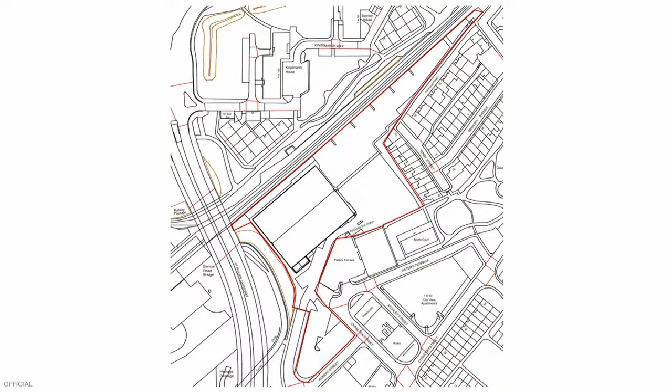The site has a number of physical and policy constraints around it. Along this northwest portion of the site is the Bristol to Bath cycle path, which is also a safeguarded area by Network Rail. Next to it is a safeguarded area by Network Rail as a former rail track that's currently not in use, and that former rail track is also an SNCI.

To the northeast of the site there is a group of residential terraces: Hemmings Parade, Tenby Street, and Brentry Avenue. To the east of the site is Gaunt's Ham Park. A small portion of the site in the south is still within the Barrow Road principal industrial warehousing area, and to the southwest is St Philip's Causeway.

It should be noted that there are a number of benefits to developing this site. It's considered to be underutilised currently, it's a previously developed site and therefore brownfield land. It's right on the very edge of the designated city centre area, and very close to the Lawrence Hill local centre, within a 5-minute walk of the train station. The site is also within an emerging regeneration area in the emerging local plan, where city centre level of density will be sought, as well as tall buildings where appropriate.

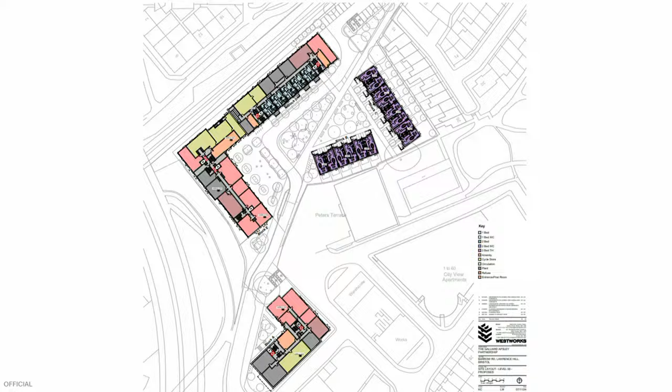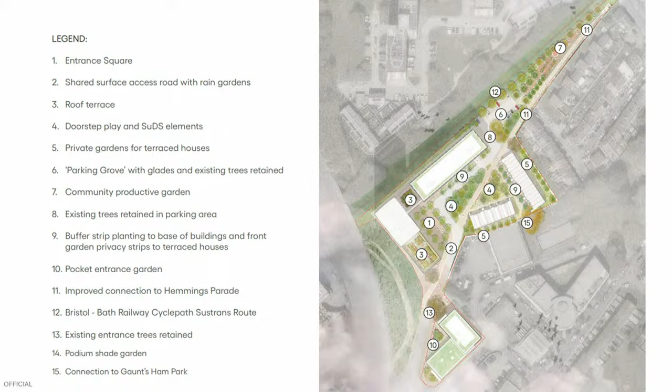Moving on to the landscape layout, there would be a social spine running through the centre of the development, including play space and community garden space, growing space in the north of the site. It would also be heavily landscaped with soft landscaping, achieving a 32.5% biodiversity net gain uplift beyond existing levels, well in excess of the current 10% requirement.

A quick note on the improvements to connectivity across the site. These aren't that clear, but full details would be secured by condition. The applicant has agreed to create a new pedestrian access to Gaunt's Ham Park, and a new level, equalities-compliant access to Tenby Street. Owing to issues with Network Rail owned land, they can't deliver at this time a new access onto the Bristol Bath cycle path, however an area would be safeguarded for its future creation as and when that becomes possible.

Looking to the right, as noted by people in the public forum, there would be an area safeguarded within a residential parking scheme to protect residents from any additional parking pressures that may arise.

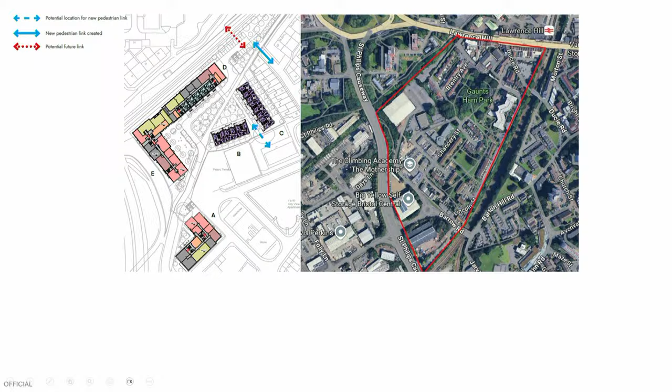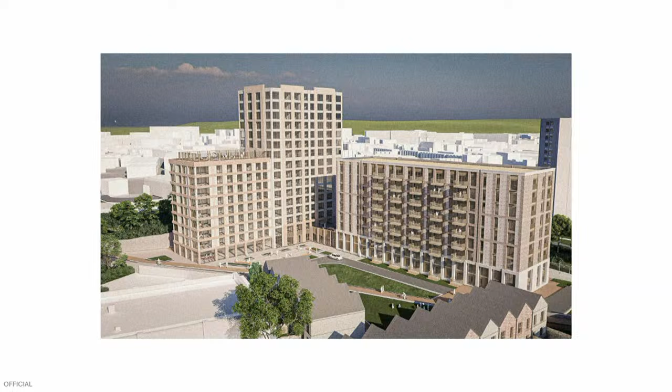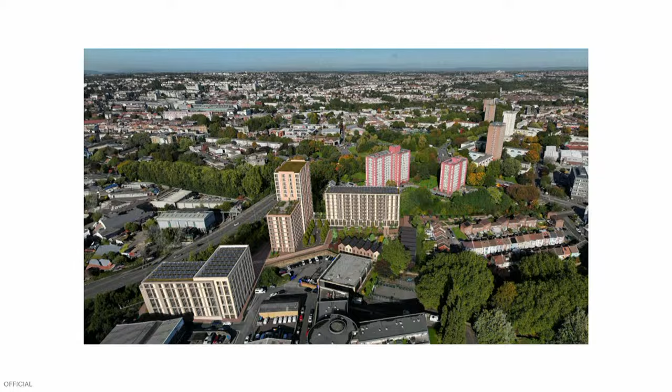Across this social spine element created in the design work, you can see Block E in the centre, Block D on the right, and the terraces in the foreground, which are Blocks B and C. This gives an idea of the general setting of the buildings and their scale in relation to surrounding development. As you can see, there's a general spine developing alongside proposals of denser, flatted development running parallel to St Philip's Causeway and Lawrence Hill Roundabout.

Moving to response from residents, 113 objections were originally received. A very large majority of these were owing to parking pressures on the surrounding area, or the perception that there would be unacceptable levels of that. That's the bulk of those objections, but not all of them. There was a considerable amount of objections from surrounding residents about the heightened massing of the buildings and their impact on amenity. There was also concern raised about the arrangement of affordable units being in one block, and notes made about how much this scheme would contribute to local amenities and need in the community.

A reconsultation was undertaken in November, and 18 objections were received. Again, the primary areas of concern were the density and intensity of development and impact on neighbouring amenity, and parking and community facilities. I should just quickly point out that revisions to proposals were undertaken.

There was an alteration to the affordable housing offering. It was originally to be a dedicated block for a housing association, Block A, as you enter the site. However, no one came forward, there were no takers for that proposal, and therefore it had to be amended as that wasn't feasible. So a reworked scheme offers 10% on-site provision, 39 units, in accordance with LHA maximum levels and capped at that level for future open market use.

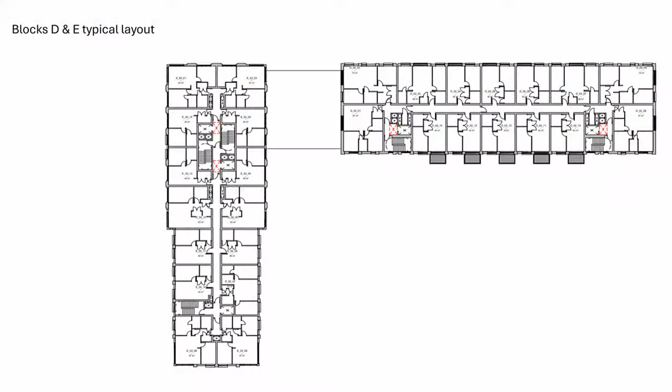Oh yes, quite right. So Zoe asked about the typical layout. Is there anything you want to comment on there, Patrick? Is it possible we can get that zoomed in a bit? It's a little bit small to see. Oh, there we go. So yes, these are the units. As I noted, they comply with space standards. We can't really control what they do with the internal spaces, in terms of what they will look like, so to speak. But I'm quite confident they would be of modern standard and high quality overall. However, in planning terms, they meet our requirements.

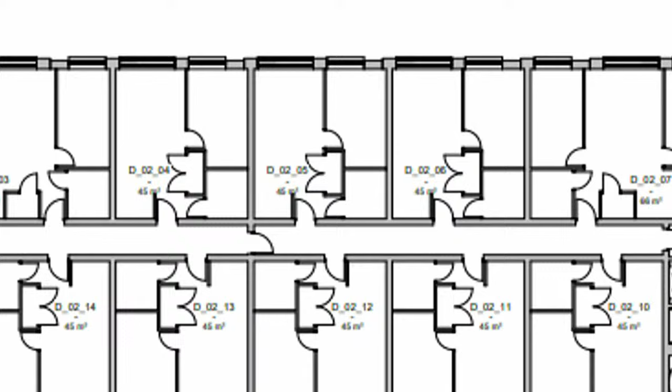Okay, I think we're going to move on to the debate. And is it a really important question of clarification?

Where do you do the laundry? I think that would be within the shared amenity spaces. There might be integrated as well. I'm not sure - I think there's a large area of shared amenity space and plant space and all sorts of space in the lower internal areas on the ground floor.

Huge improvement for British housing. Bit of maybe outside critique there.

That's fine. Okay, so should we move on to the debate? Has anyone got anything they'd like to say? Richard, you've got your hand up.

Go ahead. To me, Chairman, this is very much a no-brainer. We have here a classically underutilised brownfield site, often sadly prey to ASB and crime, with very limited community use. We have an applicant who's come forward with an imaginative scheme to build 352 houses, many of them larger 3-bedroom, and 20% affordable housing. I must say it is a long time, if ever, where I've heard a developer come forward and offer more than we've said is necessarily required from their viability assessment. So that's a plus for me, of course.

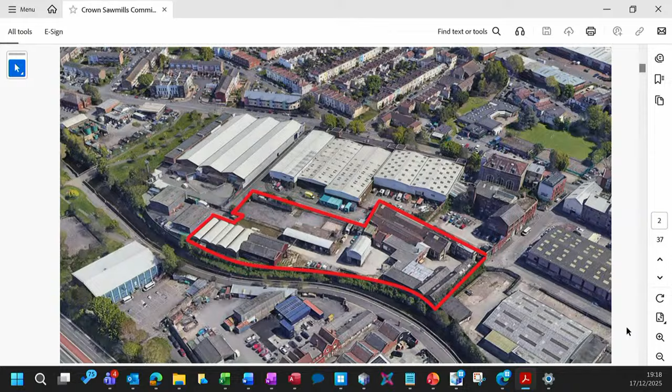The Frome Gateway Regeneration Framework, endorsed by Bristol's Cabinet in February 2024, governs the transformation of the area with its key regeneration objectives, including at least 1,000 new homes in this area, improved community and green space, a restored River Frome, climate resilient development, and more diverse job opportunities.

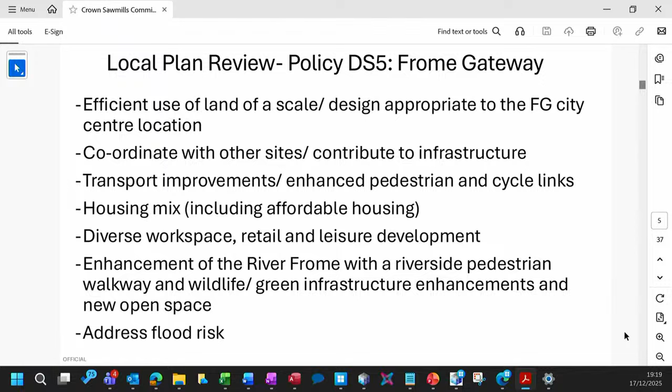The regeneration framework will be delivered through the emerging policy DS5. While not adopted yet, this is at an advanced stage and is a material consideration. The key parts of the policy relevant to this application are set out above and at page 75 of the report, and in particular, this highlights the need to take a coordinated approach to sites.

The key considerations influencing site development include, in terms of constraints, a strategic sewer running beneath the site, which cannot be built over and requires an easement - that's the red arrow on the plan. The site is also wholly within flood zone 3 at high risk of flooding - you can see the blue line outline on that plan. In addition, the Environment Agency requires access for maintenance vehicles to the river.

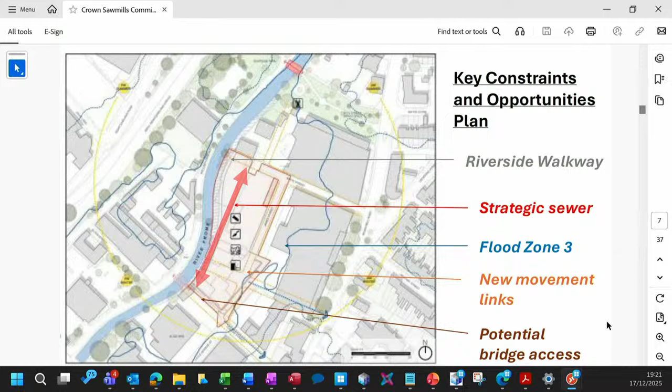The proposed layout addresses these constraints and opportunities and comprises 70% public open space. The proposed riverside park area, shown in the plan here, would enhance amenity and ecology and provide a riverside walkway and Environment Agency access. The space would be fronted onto by the proposed community space in Block D - that's the smaller block adjacent to the river - with other active employment uses shown in blue above along the river frontage and James Street. The green spaces shown on that plan are the residential lobbies with plant rooms in dark grey, and light grey is cycle and refuse stores.

The proposal also includes a connection through the site to the riverside, which could potentially join up with other forthcoming development leading to Pennywell Road. The proposal is for 352 homes of build-to-rent tenure, comprising a mix of sizes with 20% affordable housing of affordable private rent tenure and 10% wheelchair accessible adaptable homes. The housing mix is considered acceptable by officers as set out in the report, and this provision is a significant benefit of the scheme.

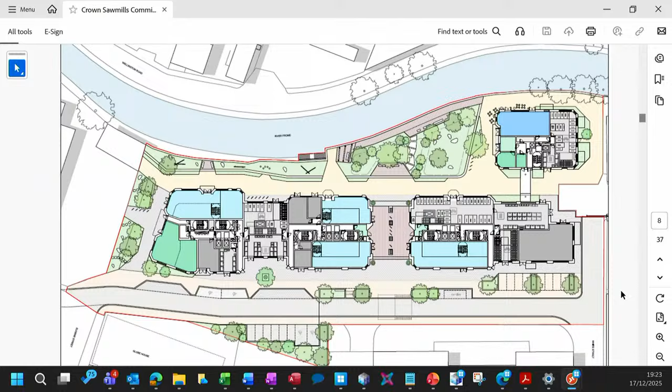In terms of the appearance, the proposal takes the form of 4 main blocks connected by lower scale link blocks to break up the massing, with varying heights, shown with the tallest element at 20 stories.

Above shows an artist's impression from Wellington Road, in particular showing the proposed brick colour variation. These are artist's impressions, and decisions should be taken based principally on proposed plans in addition. Updates to the scheme during the course of the application were minor and centred on changes to Block D, including the window arrangement, balconies and brick colour from a dark grey to red - that's the smallest block in the image.

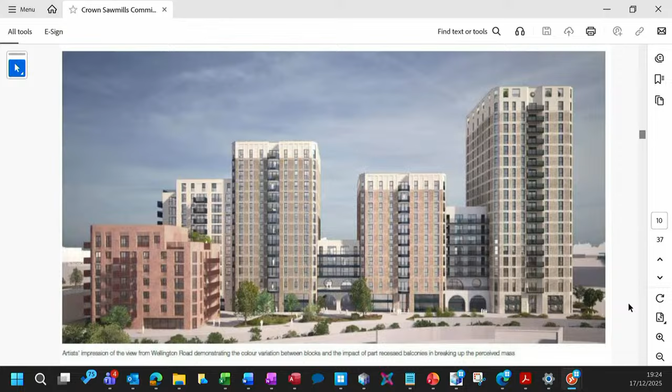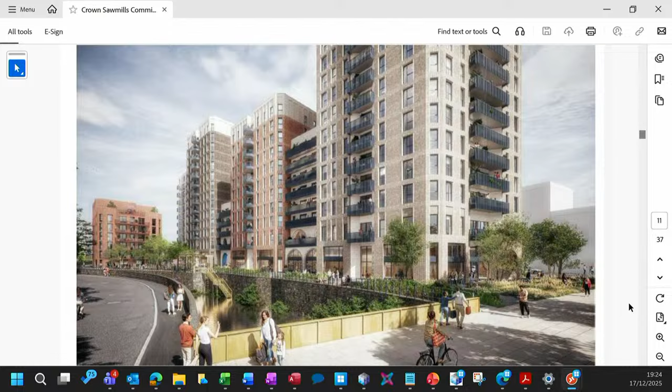Above is a further artist's impression from Wellington Road, showing a pedestrian level perspective from the bridge. The bridge crossing across the river does not form part of the application. However, it's important to note that the application would contribute land to the access to the potential bridge in order to make construction possible. The feasibility of the bridge is currently being explored.

Turning to key considerations, these are reviewed in full in the report. For the purpose of the presentation, I'm going to review the matters of height and flooding in more detail. Overall, the scheme is considered to be a quality and contextually appropriate design. However, as it is a tall building, further detailed consideration is needed.

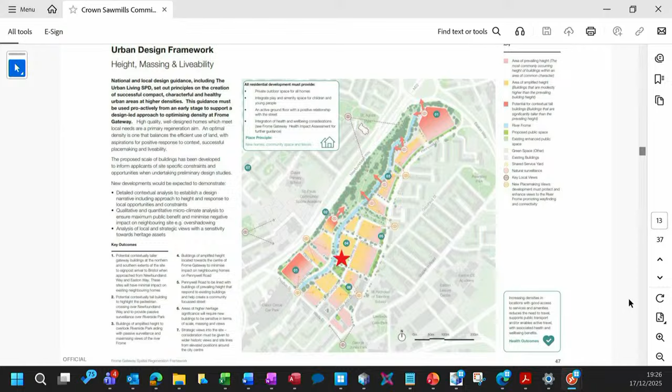Sorry, bear with me a second.

There has been some technical debate over the methodology of the view production, which the applicant has responded to. However, it is advised that when considering the closer range views, these should not be relied upon in reaching a judgment, and to exercise some caution in considering these. However, officers consider this doesn't materially affect the recommendation.

The views have been confirmed as being acceptable by the urban design team, bearing this in mind, and I'll refer to the difference between these and the longer range views in a moment. Next slide, please. So I'll just run through a number of views.

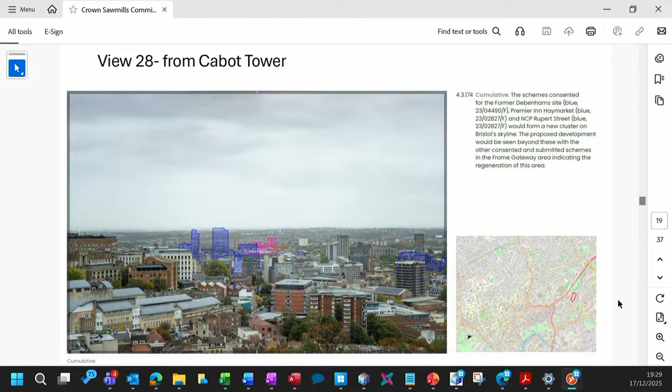Page 27 of the report refers in further detail. Moving on to the longer range views, there is no debate over the following views in terms of the methodology of the image composition. The above view from Cabot Tower with the development in pink shows relatively lesser impact than already consented Debenhams and Premier Inn schemes in blue.

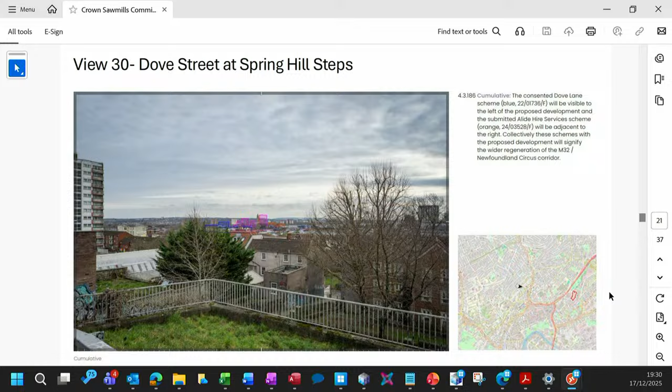Next, please. This view 30, also from Kingsdown, shows again the proposal in pink wireframe, slightly to the side and behind St Paul's Church spire, noting that obviously the wireframe does make it more prominent because of the colour. This view shows the greatest impact in the view of officers and is noted. This is given considerable weight, but still concluded to constitute less than substantial harm that should be weighed against the public benefits of the scheme, as at page 27 of the report.

And the final view I'm going to present is, again, worth noting, a winter view. It's the view from Ninetree Hill. Overall, there's no objection from officers on these impacts.

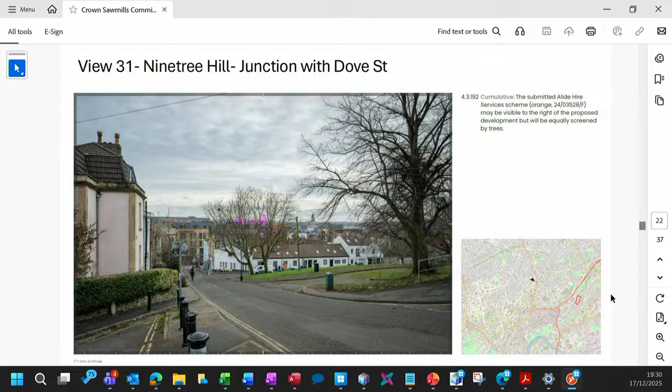In conclusion, the proposal has followed the guidance of the framework to carry out thorough visual impact assessment and is being demonstrated to be acceptable for a taller building in terms of visual impact, with other considerations of microclimate being considered within the report.

Turning to flood risk set out at page 40 of the report, since the completion of the report, the Environment Agency has provided a number of clarifications set out in full above, which officers are required to update members on. I won't go through these in detail, but members have received a copy of the presentation, and importantly to note, the above are technical clarifications and do not change the recommendations of the report.

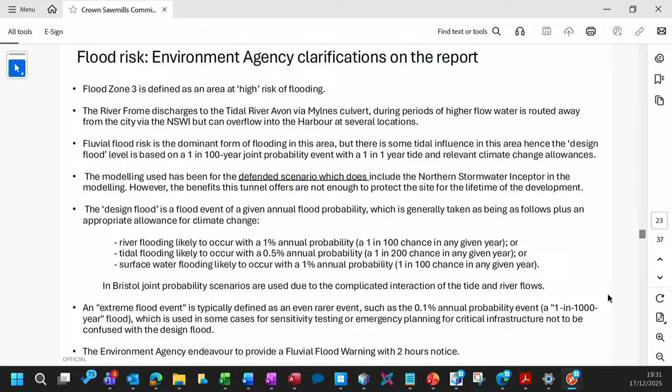In summary, on flood risk, officers have been liaising with the applicant and the Environment Agency in detail over whether the level of flood risk for the site can be addressed. While the sequential test element has been passed, addressing the other aspects has required further detailed modelling to show the off-site impacts and final flood depths affecting access routes.

The application proposes to mitigate its impact on flood risk through a water entry strategy, as shown above by the spaces in dark blue, which would mean that cycle stores and refuse stores would be allowed to flood during flood events to accommodate water that would otherwise be displaced elsewhere. The Environment Agency has indicated acceptance of this approach, subject to LPA confirmation that this is accepted to be safe. These spaces, in particular the cycle stores, include internal escape stairs and mezzanines to mitigate safety issues. Further detailed modelling aims to show the impact on flood routes.

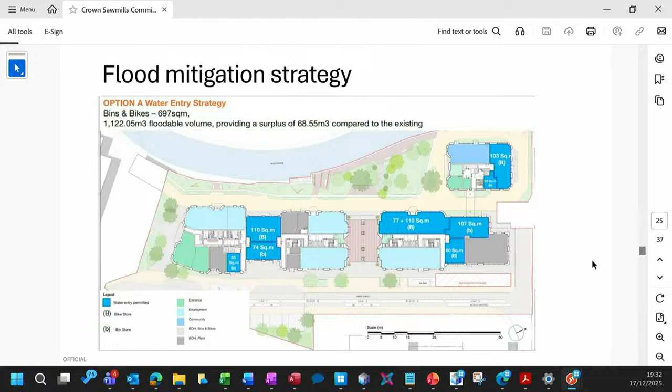Essentially, a final response is needed from the Environment Agency, and these technical matters do require further consideration, and hence officers are seeking that they be delegated to officers to consider further, while seeking the decision of members on all other matters. We do have our flood risk manager with us today if you have any further comments on this.

So, in concluding remarks, in view of the Council's housing land supply, the NPPF requires a presumption in favour of sustainable development unless there's a clear reason for refusal based on protected assets. In this case, that would be heritage assets. And in the view of officers, this wouldn't be a reason for refusal. The second part of that being whether any adverse impacts of granting consent would significantly and demonstrably outweigh the benefits.

So just in the final slide to conclude, the summary above provides an overview of the main shortcomings or key impacts of the proposal versus key planning benefits, also summarised at page 55 of the report. In particular, the proposal is for build-to-rent homes on brownfield land, making more efficient use of land in a sustainable location, providing policy-compliant, affordable and accessible homes which carry substantial weight.

This proposal also makes significant public realm provision. So in the view of officers, the planning benefits would clearly outweigh the adverse impacts and would achieve the delivery of the framework objectives. So just to reiterate, officers would be seeking delegated authority for approval of the application subject to resolution of flood risk, also subject to drafting conditions and section 106 matters outlined within the report. Thank you.

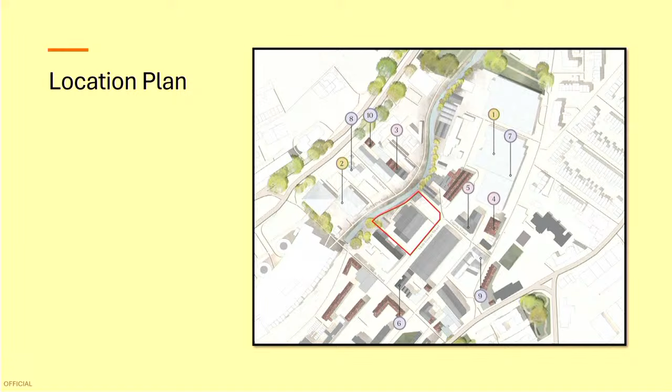As I say, I'll whiz over these quite quickly, but this is the site which is directly adjacent to the Crown Sawmills site that you've just been considering. Currently, it's allocated for employment use, and it's also within the Old Market Neighbourhood Plan area.

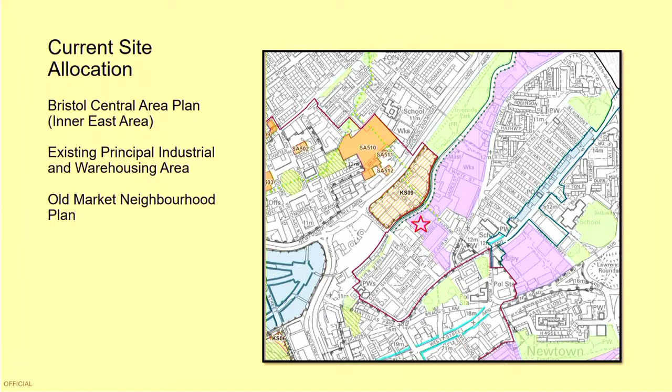Whilst its current allocation is for employment, it is within the Frome Gateway Regeneration Area, which is covered by Emerging Policy DS5. I won't expect you to read all of that, but I've highlighted the bit that's probably most relevant to your decision today, which is that Emerging Policy does set an expectation for provision of 500 student bed spaces within the Frome Gateway area. As we sit at the moment, there are no bed spaces that have been provided, so this would be the first scheme to come through to provide student bed spaces. On those grounds, we feel that it does accord with the emerging policy, and as you've heard previously, we feel we can give that quite a lot of weight in this case.

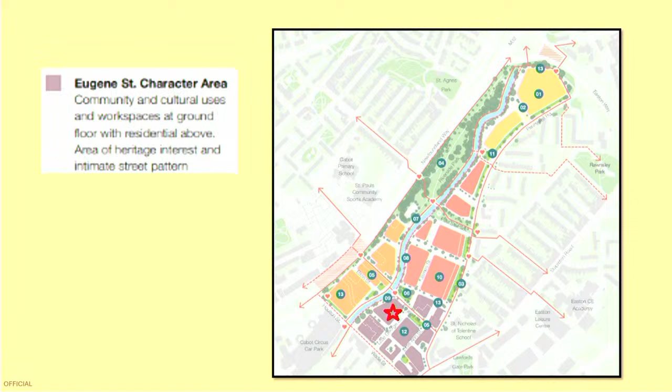Frome Gateway is divided up into different areas, and this is the Eugene Street character area, which, as well as residential uses, also talks about ground floor uses, particularly cultural uses and workspaces, again in line with what's being provided on the application site.

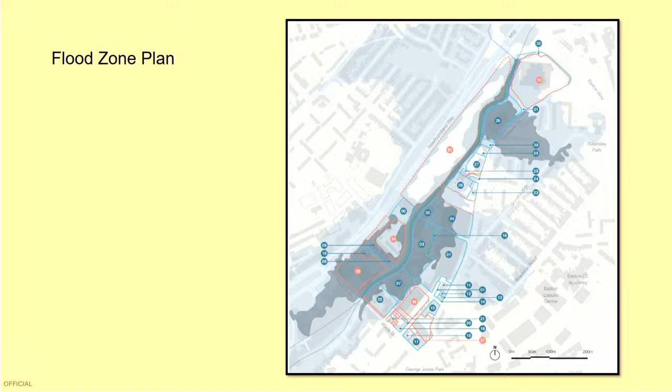Here's the flood zone map, which you'll be familiar with. This site is pretty much entirely within flood zone 3. The slightly lighter blue colour is flood zone 2, which is medium risk of flooding. As we've previously touched on, this area is liable to flooding. I'll talk a little bit about the Environment Agency objection in a moment.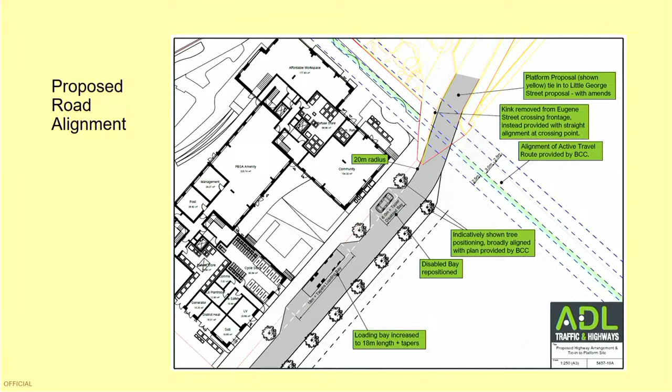In terms of the scheme coming forward, you'll see in the report there are quite detailed comments from the highway officer, and we've been working hard with the applicant to provide as much of those highway changes to turn this site from an industrial area into a more appropriate site for residential. Essentially those parameters have been set by us in terms of how that road links up with the James Street extension that the Crown Sawmills site will deliver, and then the Eugene Street extension, shown in lighter grey on this plan, will link with a potential pedestrian cycle bridge across the Frome, which this site will deliver the link for. As before, the bridge is not part of the application. We're still considering the viability of delivering a bridge in that location, but this scheme makes allowances for it. So that's really set the parameters for the site in terms of what's the developable part of the site.

The building itself is an H-shaped building. It's not very clear on this plan, unfortunately, but that space in the bottom right-hand corner is the community floor space. In the top right-hand corner is marked as workshop space, although it will be a sort of flexible E-class use, which could be something like a cafe or similar. There's also a Frome side walkway going through.

We intend on securing the final landscaping details through condition, but this has been set so that the Environment Agency have access to the River Frome. We think that can be restricted a bit, and we can get a bit more landscaping in that area through condition.

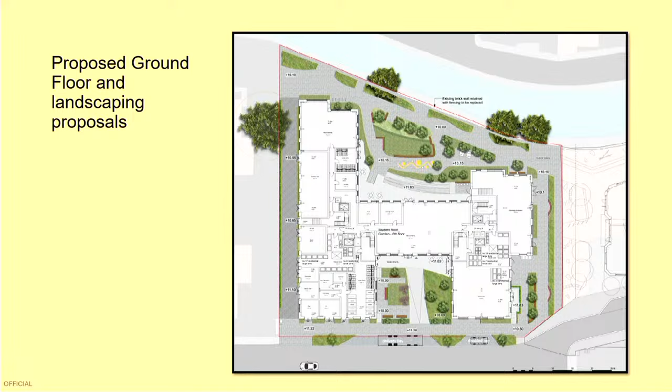It goes up the building in very much that fashion. This is the 6th floor. I included this because it shows access to a rooftop garden.

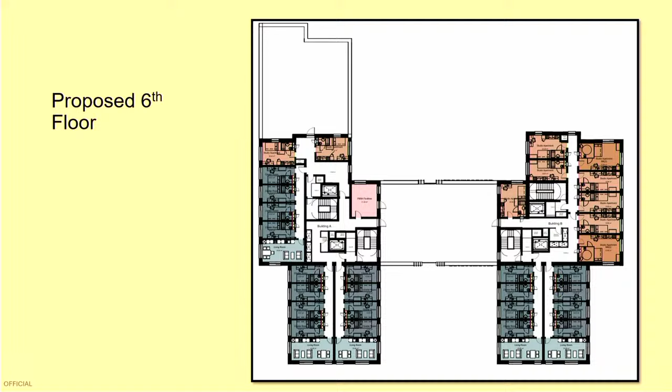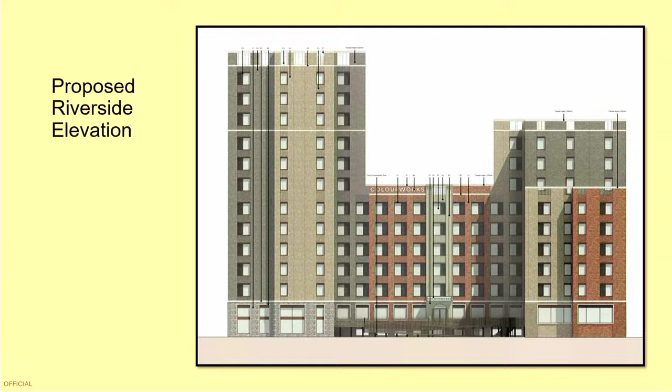In terms of flooding, this site is probably simpler than Crown Sawmills, but there is still a high risk of flooding on this site. The building has been designed so that those two purpley bits on the plan are a raised slab with a void underneath, so floodwater will travel underneath the void, providing mitigation to prevent the floodwater impacting on neighbouring sites. All of the residential accommodation will be above the design flood level, which is the level it needs to be at to be safe in respect to the Environment Agency's concerns. And in this case there is access out to the road, which will be reasonably dry in any flood conditions.

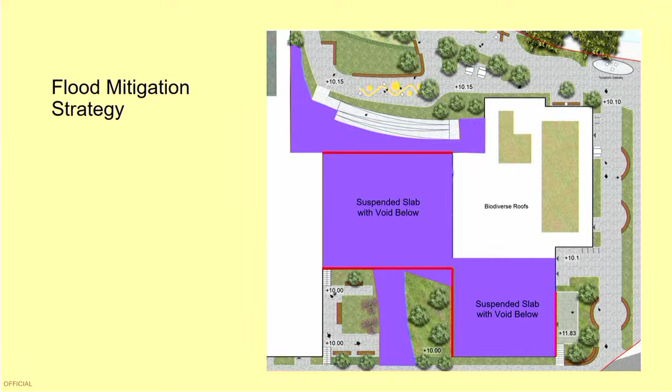The outstanding concern from the Environment Agency is a technical modelling point, essentially about whether the modelling has taken account of all the necessary scenarios. It's very complicated and expensive to run modelling runs, as I understand it, but we've asked them to run another model to take account of all those scenarios. We're pretty confident it will show there's no impact on neighbouring sites, but as before, we're asking for delegated powers to approve the scheme once that issue has been sorted.

I thought I'd include this, which shows it in terms of the existing and emerging context. You'll see the neighbouring site in beigey colour, which you've just resolved to grant permission on. The current application is in pinky colour, which we're currently considering. The yellow is approved development, and the green colour is another scheme at pre-app stage, but that's quite a long way off, so I won't worry too much about that one.

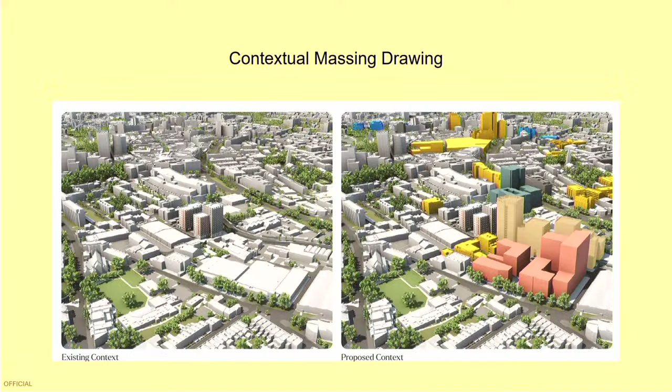But it does show you all the other schemes that we are considering in that area at the moment.

As a final conclusion, I've listed what I think the main considerations are, and how much weight I think should be given to them. It's pretty green, I think, so that's positive. The only potential issue is the scheme is slightly higher than the parameters suggested in the development brief, but as you'll have discussed earlier, that is only guidance, and actually this one is pretty close to what the development brief expects anyway.

Maximum height is 12 storeys, by the way. I probably didn't say that, but it's 11 plus ground floor.

Finally, heritage impacts are neutral. We're happy with the amenity impacts. Climate change performs well, transport performs well, biodiversity performs well.

The red issue is flooding. We're confident that it can be resolved, but we do need to wait for the Environment Agency to comment.

Just a couple of final things to bring to your attention. The CIL allocation from this site will be, depending on the uses of the ground floor, about £2.1 million, so that will be a contribution from CIL.

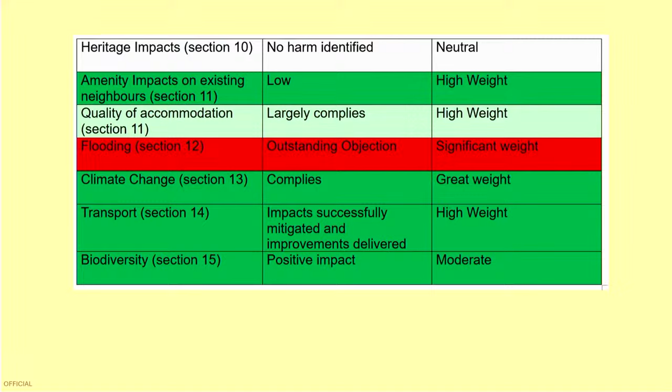Thank you, Lewis. I think I'm going to start by just asking for the health thing again. Sorry, could you just please say one more time, Jim, because if people watch one section of this meeting back, it's important that we recognise it — the health implications of this in terms of provision. Sorry, Jim, but it is, yeah. I will go shorter this time.

Thank you, Councillor Reddy. So, there is a health impact, or an impact on GP surgeries. We're not unsympathetic to the ICB. We just feel it's quite difficult at the moment to secure planning obligations in the form of financial contributions, simply because the ICB aren't able to identify surgeries in the local area that they're looking to expand or increase capacity at, and at the moment they don't have any plans for a new surgery in the area that they can put down and show us. So they're really just asking for a contribution towards something broadly unspecified, which causes some angst with the CIL tests, which are what we're tested on when we seek planning obligations.

I think the longer term solution is perhaps through some utilisation of the strategic CIL that the city collects. Obviously the three developments we've been hearing about this evening will all be paying in the region of £2 million worth of strategic CIL if they come forward. Other developments across the city all pay strategic CIL, and the council is looking at the potential, through the strategic CIL allocation process, of considering whether to apply some strategic CIL to the ICB as and when schemes come forward, such that they could make a drawdown in that respect. So I think that's perhaps the most pragmatic approach to dealing with developer contributions towards the ICB as it stands at the moment.